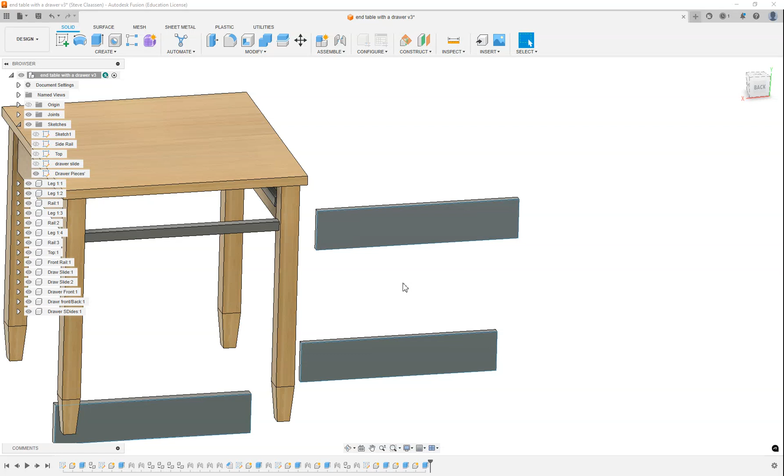Part 3 of the drawer. So the first thing we're going to do is we're going to run what's called a dado along the side of the side rails. All right. So pretty simple, straightforward. Do a sketch on this front edge. And what we're going to do is we're going to do P for project. Okay, and what P for project does, just does the outline of the object, which makes it simple.

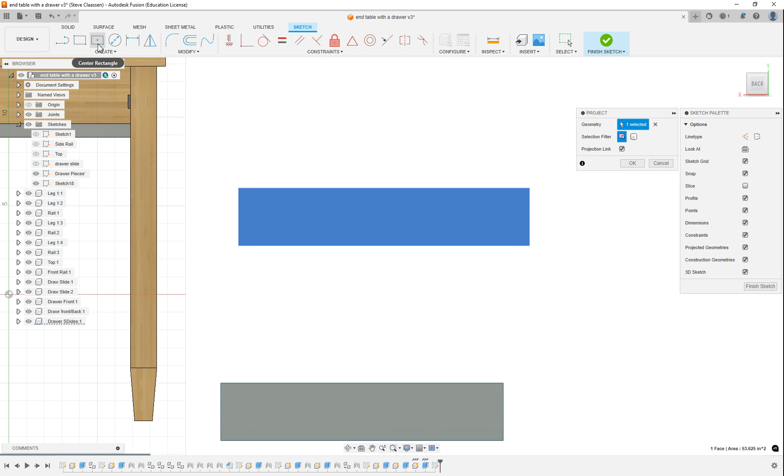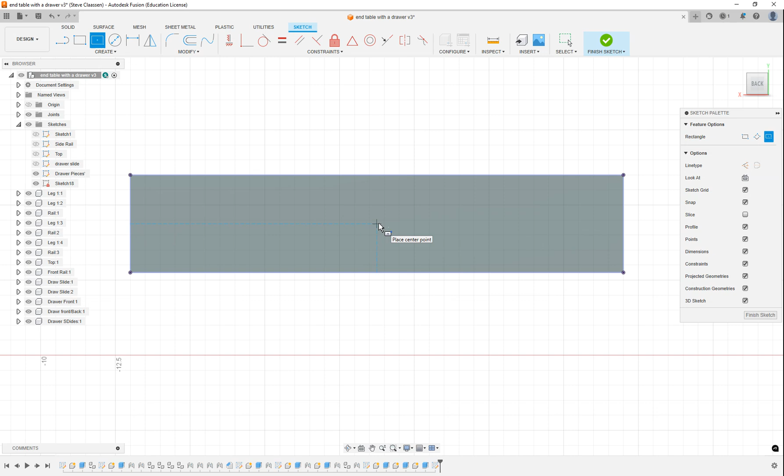Okay, now I'm going to use a center rectangle. So if I come down here to rectangle, center rectangle, and I'm going to scroll in here a bit. And if I go along here, you can see that right there, there's a triangle. It might be hard for you to see there. You can see this line. Now, if I come up this way, and I go this way, you can see that triangle. So there's a line there, and there's a line there. Now, it might be hard to see. I'll scroll in. You can see now I got two lines, okay? And what that is, that's dead center.

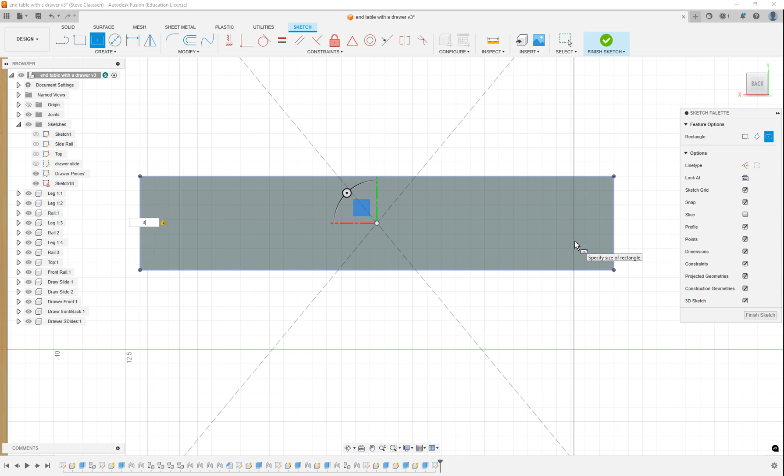Now what I can do is just run like this and go out, and I want that length to 16.5, which it is, and the height to be, let's go 3/4. So 3/4, okay? And this is just going to go to the end, and it's 16 and a half, 16.5. Whoops, that was supposed to be 3/4. My apologies there. And this one is 16.5. Okay, and I just hit finish sketch.

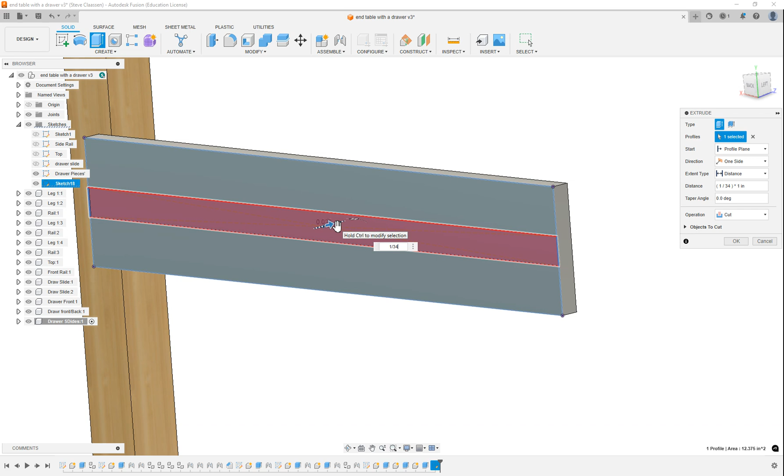Now, all that does is creates a little slot there. So when we go extrude, and we take this slot, and let me just get it picked. Doesn't want to, there we go, sorry. And I'm going to go back in 1/4 inch. So I'm going to suck this way, 1/4 of an inch. There we go. Okay, so there's the first part done.

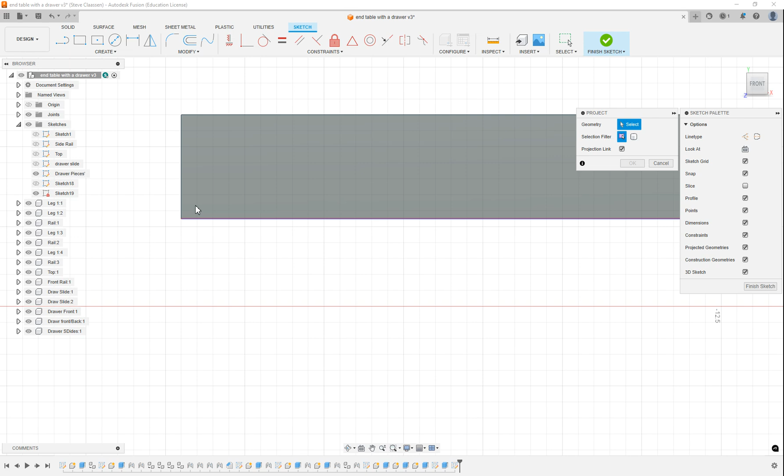Now the second thing is on the other side of it, I want to do a little slot as well. So I'm going to go to the back of this and do a sketch. And this is for the plywood to slide into for the drawer bottom. So this time I'm just going to do a P for project. Pick the whole box. I'm going to do this one, and I'm just going to grab from here and go over to the edge there. There's 16 and a half. And this one's going to be 1/4 of an inch high. 16 and a half. I'm going to hit enter.

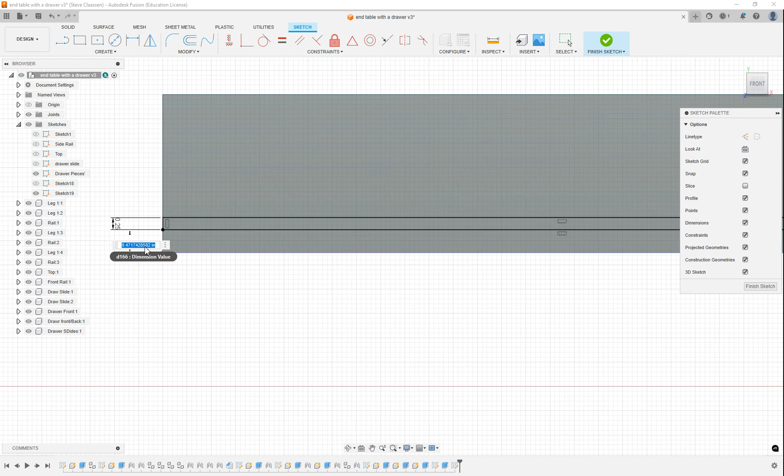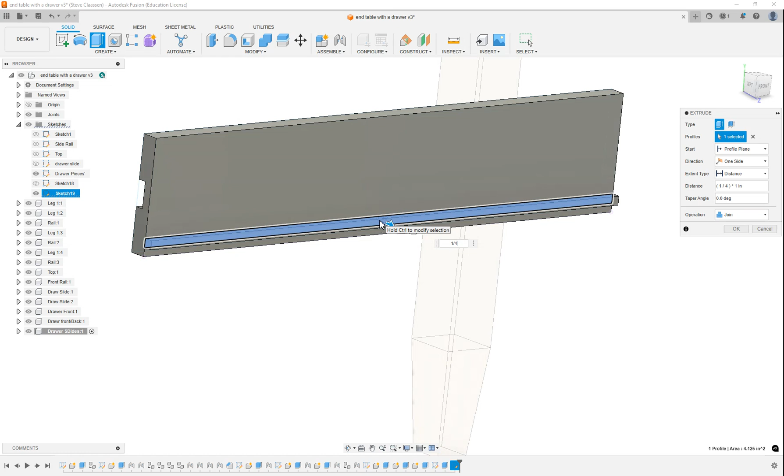And then what I'm going to do is dimension it from here to the bottom. I'm going to make it 1/4. Whoops, I went 1.4. Sorry about that. Hit escape. And double click this and go 1/4. That's better. Finish that one off. Now that I've done that, I'm going to extrude it. And I'll extrude it in 1/4 again, and I'm going to go -1/4, so it cuts in. And we hit OK.

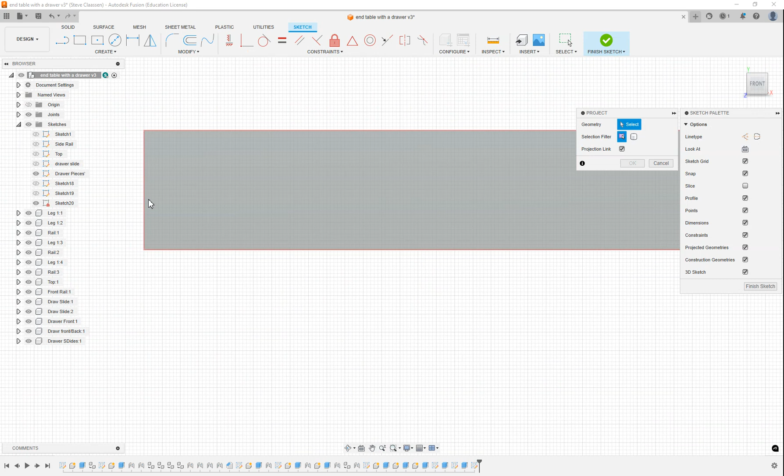So there's our drawers. That's the outside of the drawer. This is the inside. And what I've done to that one, I also have to do to this front and back one. So I'm just going to draw on the back side of this one just to keep everything kind of the same. So draw this one and move it around. P for project. That lets me put this red line around everything. Grab this, and that means it snaps into place. I'll scroll out a bit. Snaps into place, 16, hit enter.

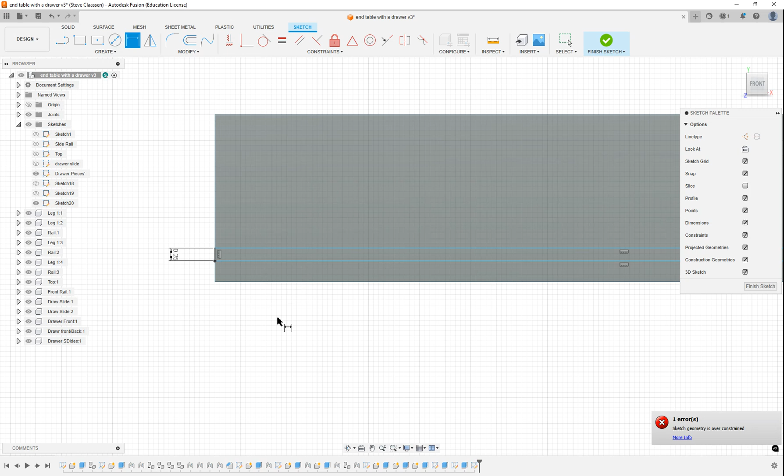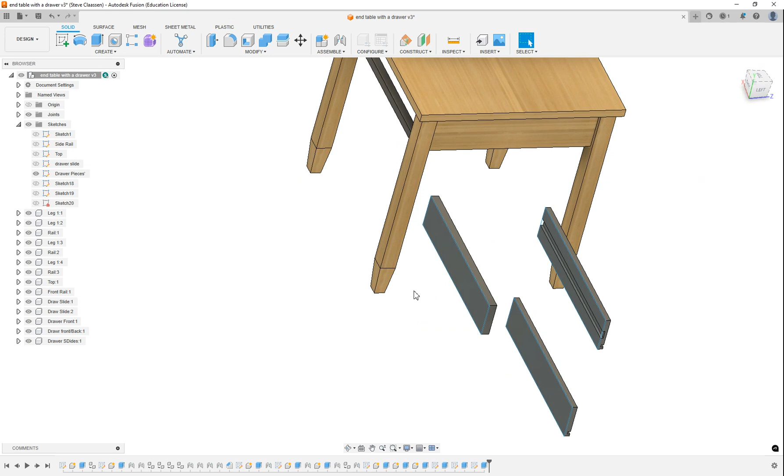Now, I forgot to dimension it right away, so I'm going to grab my dimensioning and go from there to there. And that should be 1/4. And from here to the bottom, oops, cancel, I went the wrong spot. From there to right there is 1/4 as well. And we hit finish. And finally, we extrude it in at -1/4. There we go. There's all our pieces basically done to put our drawer together. And the next tutorial is going to be assembling the whole thing. So we're going to stop here.